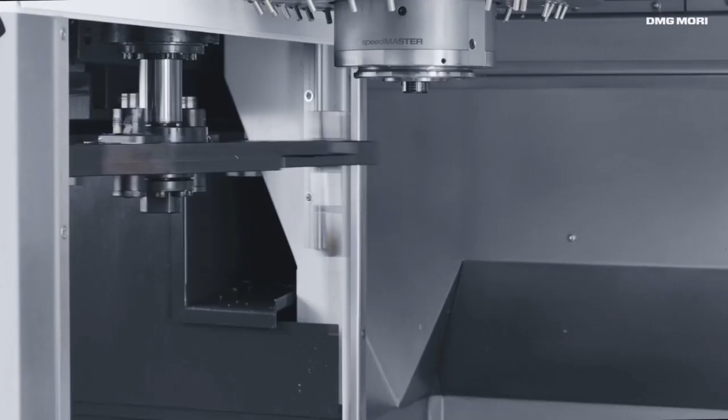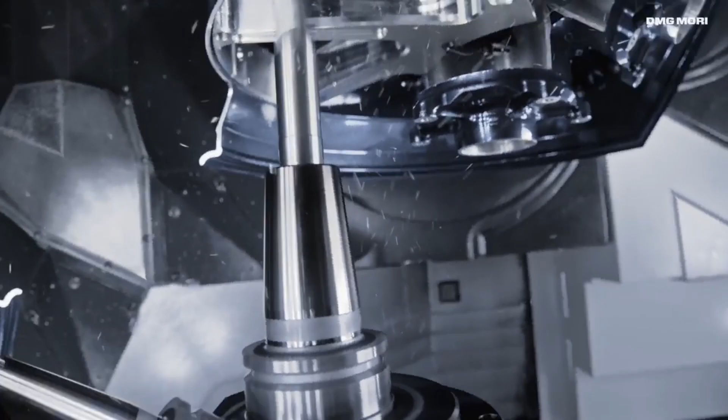The company's product portfolio is extensive and includes high quality CNC machine tools, lathes, milling machines, grinders, and additive manufacturing systems. These cutting-edge machines are designed to optimize efficiency, productivity, and accuracy in various manufacturing processes, helping businesses achieve higher levels of performance and competitiveness.

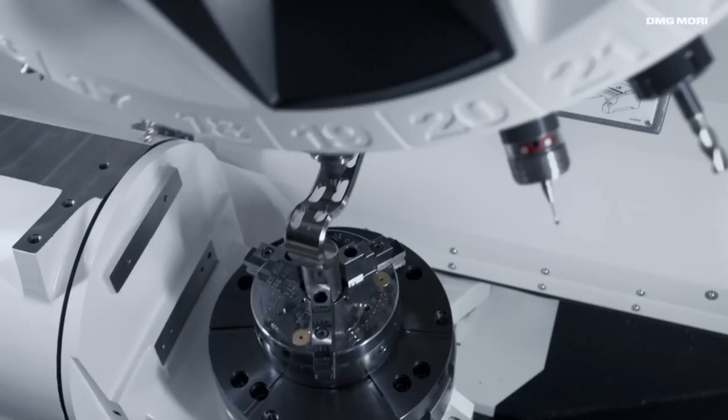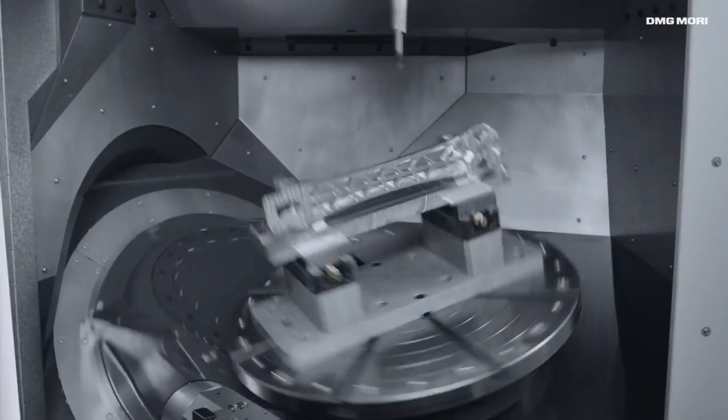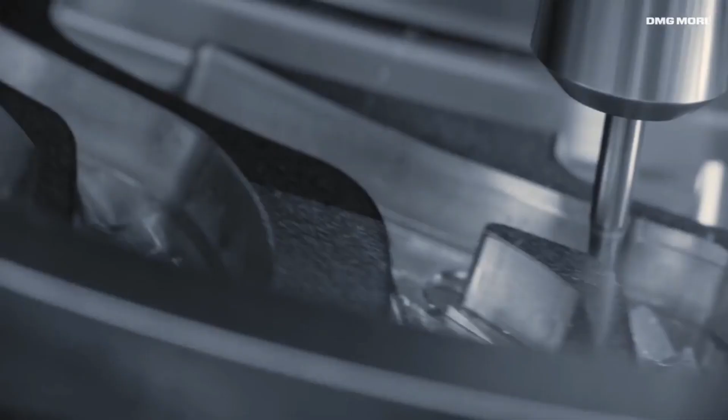DMG Mori's commitment to innovation and research is evident through its continuous development of advanced technologies, automation solutions, and software applications that enhance the overall manufacturing process. As a customer-centric organization, the company also places great emphasis on providing excellent technical support, training, and maintenance service to ensure that clients get the most out of their equipment.

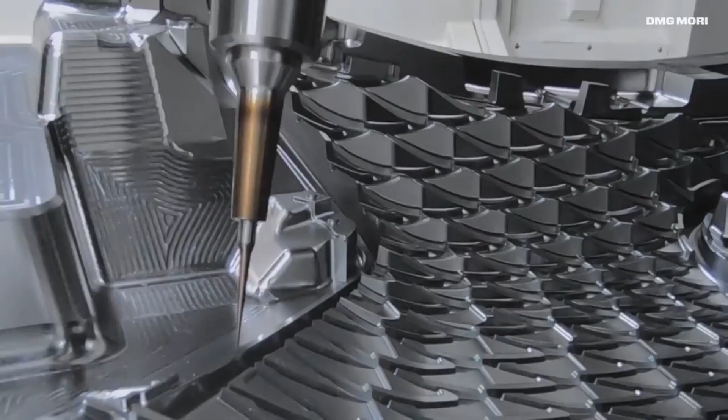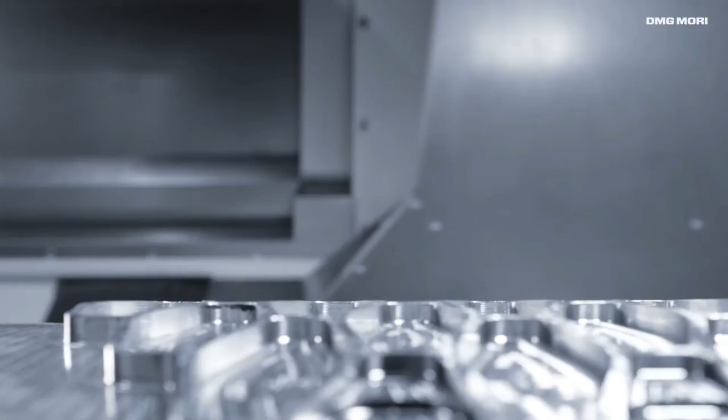In conclusion, DMG Mori's history, technological expertise, and commitment to customer satisfaction have solidified its position as a leading player in the machine tool industry, driving innovation and shaping the future of manufacturing and engineering.

In addition, I will also explain the problems and challenges that will be faced by the DMG company. Number one, they will face rising costs. Number two, shop floor productivity. Number three, lack of training among the employees. Number four, competition between the companies. And number five, technology advancement.

Rising costs. Rising prices of raw materials, increased expense of labor, or changes in government laws. DMG Mori's profit margins have been under pressure in recent years due to the rising cost of raw materials, labor and energy. Because of that, DMG Mori's production costs have increased and the company had no choice but to pass on higher prices of their products to the customer. This challenge is also caused by the company's production facilities being located in Japan, which we all know is characterized by a relatively high rate of wage inflation.

Number two, shop floor productivity. This indicates that the company's manufacturing process was not running at the optimal level of efficiency, which led to a decrease of output and increased the amount of time it took to produce the products. This could result from several issues including inefficient workflows, bottlenecks, equipment malfunction or insufficient resource utilization. For example, the machines may not be arranged in a manner that makes sense, or there may not be sufficient space for employees to easily move around. This may also be caused by the fact that the DMG Mori factories do not follow the standardization guidelines.

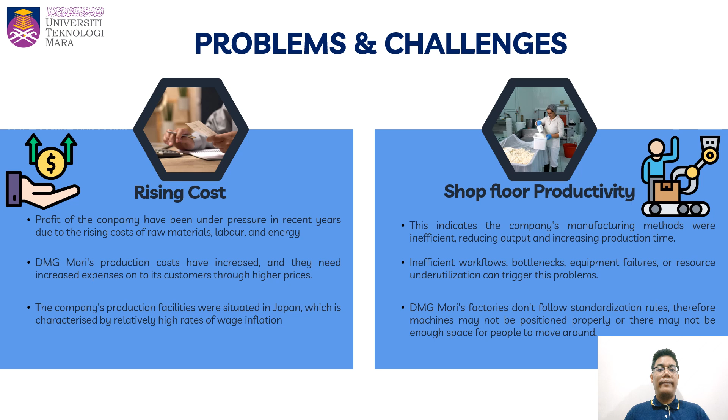Lack of employee training. The phrase lack of employee training refers to instances in which corporations such as DMG Mori fail to offer staff adequate learning and development opportunities to improve their skills, knowledge and capacities. Employees run the risk of not possessing the necessary experience and ability to properly do their job if they do not receive the appropriate training. This lack of skill can lead to inefficiency, errors and diminished capacity to handle difficult activities, which will ultimately influence the company's production and overall performance.

Number four, competition. DMG Mori faces competition not only from local and regional manufacturers but also from formidable global competitors. It can be shown that DMG Mori competes with firms such as Siemens, Mazak and Okuma. There is a possibility that international competitors will have lower labor and operating costs in their own nation, which will provide them a cost advantage.

Technology advancements. Technology advancement might make it difficult for the corporation to remain one step ahead of its rivals. Businesses that consistently put money into research and development (R&D) to come up with innovative products and services gain considerable competitive advantage. So, DMG Mori must compete with companies that are at the forefront of innovation.

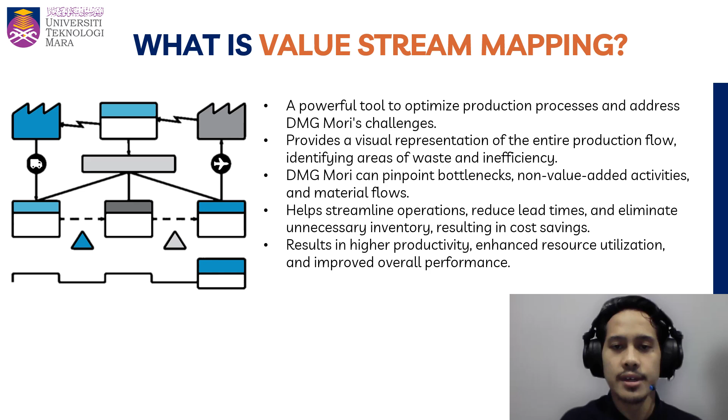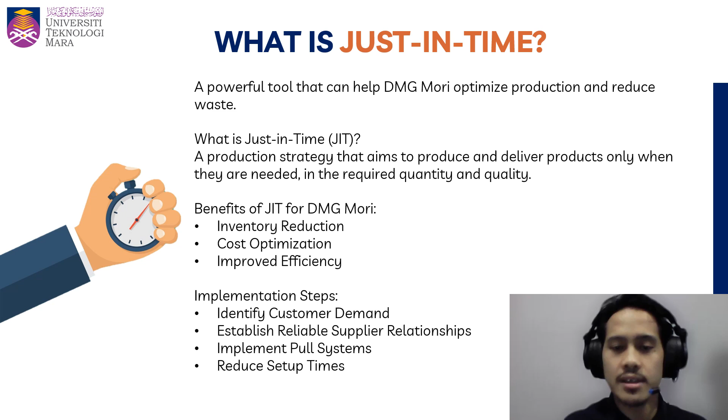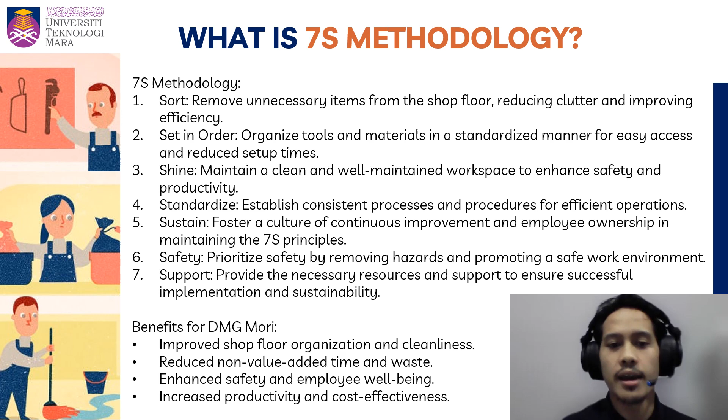By applying the 7S methodology, DMG Mori can benefit by improving shop floor organization and cleanliness. It can also reduce non-value added time and waste, and also enhance safety and employee well-being. Other than that, it can also increase productivity and cost effectiveness. Thus, implementing the 7S methodology can lead to a well-organized, safe, and efficient shop floor, addressing DMG Mori's problem and driving the company towards greater success.

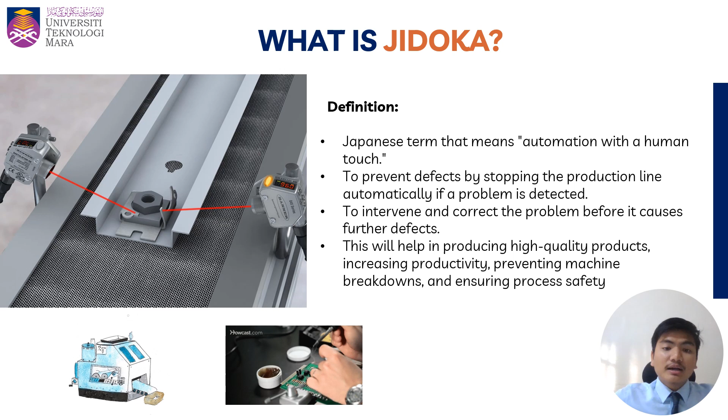This Jidoka system can be implemented in 3 parts in manufacturing a CNC milling machine: machining of components, electronics and control system, and lastly calibration and testing.

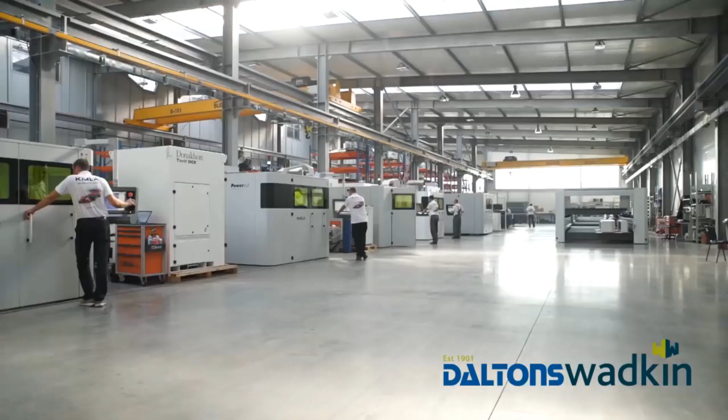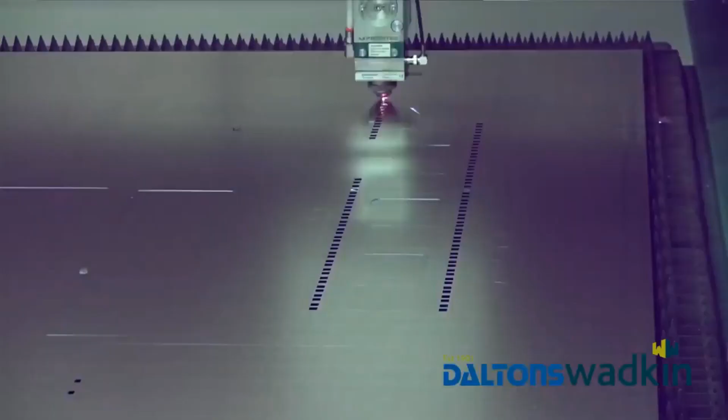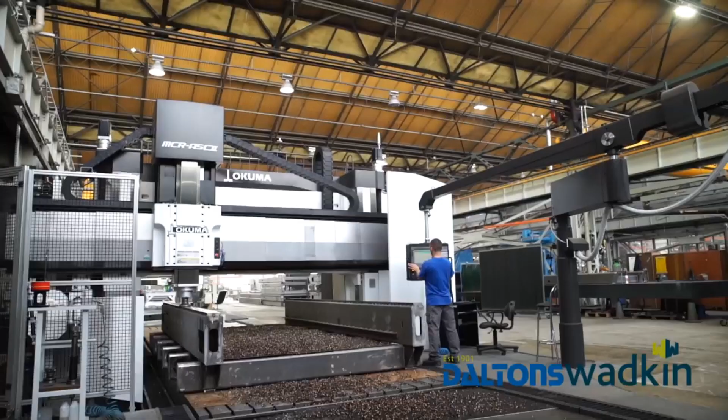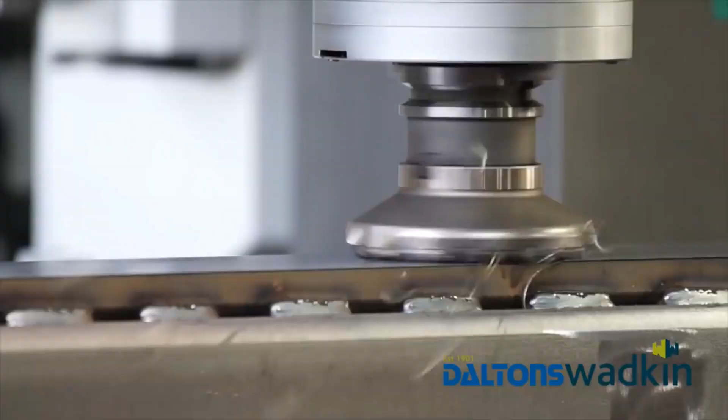The machine structural components like the base, column, saddle, and headstock are manufactured through various machining processes such as casting, milling, turning, and grinding. During the machining of the structural components, the Jidoka system can be employed, such as a force sensor. This sensor is used to monitor critical variables such as cutting force, tool wear, and spindle speed, and to provide data on the force applied during the cutting process. They are placed between the cutting tool or holder and the machine spindle or workpiece. If an abnormality is detected, the system can automatically stop the machining process to prevent the production of defective components.

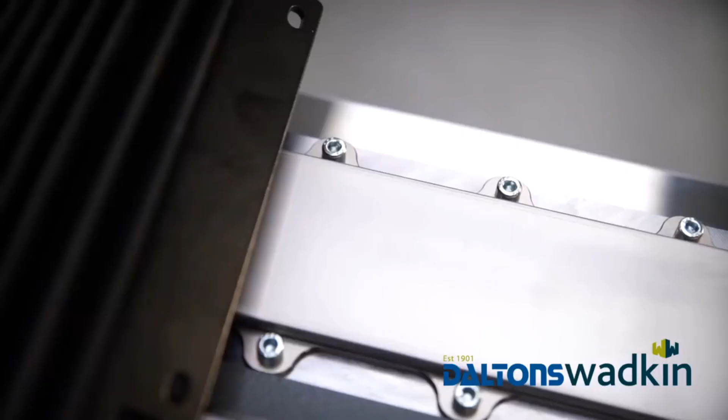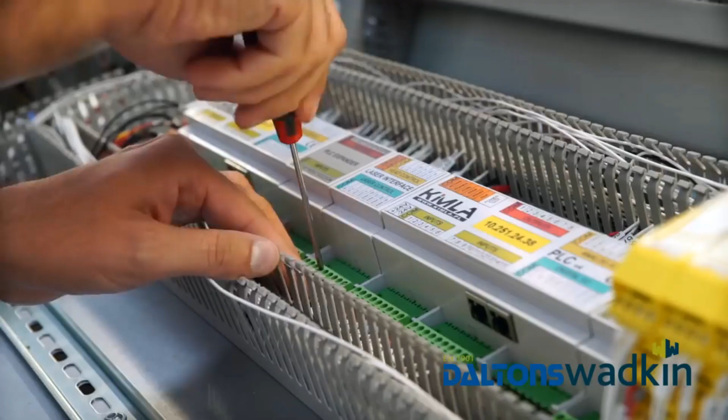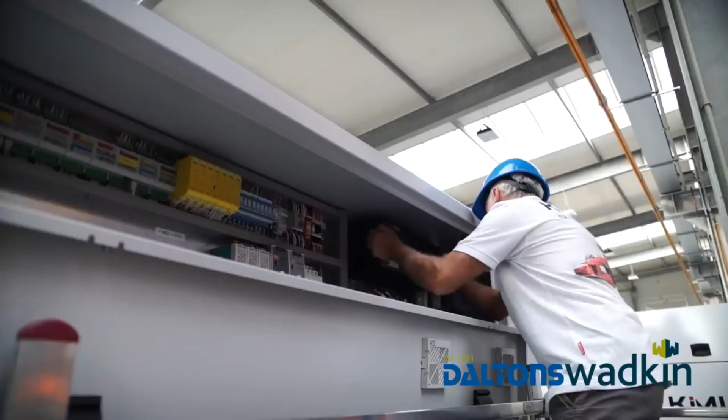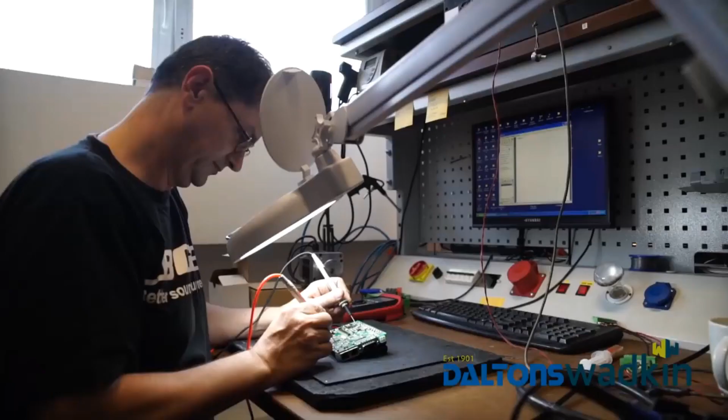Another manufacturing process that can implement Jidoka is the electronics and control system. The machine integrates various electronic components, including the CNC system, motor drivers, and controllers, which allow precise control over its movement and cutting operations. The Jidoka system employed during this stage includes a current sensor. This sensor monitors the electrical connection and motor functions by measuring the electrical current flowing through critical machine components like motors and motor drivers. Continuously monitoring the current levels, the sensor can detect any abnormal spikes, drops, or deviations from the expected range, indicating potential issues in the electrical system or motor functions.

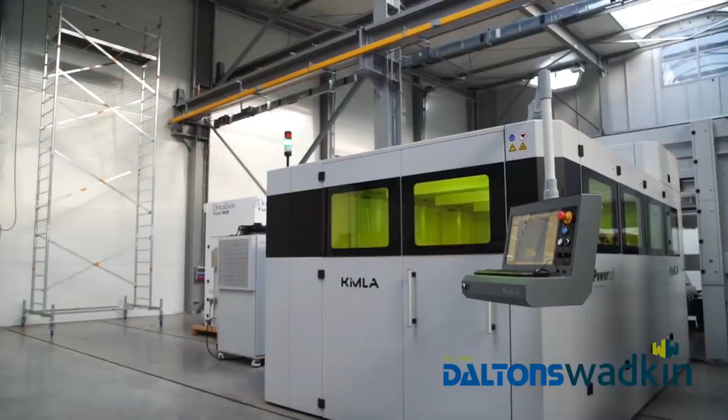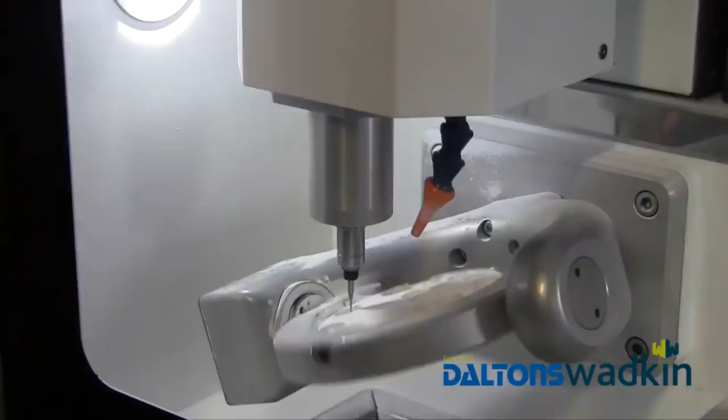When such abnormalities are detected, the Jidoka system automatically halts the integration process to prevent further damage. It also alerts the operator or maintenance personnel about the detected issue, enabling them to investigate, identify the root cause, and implement corrective actions.

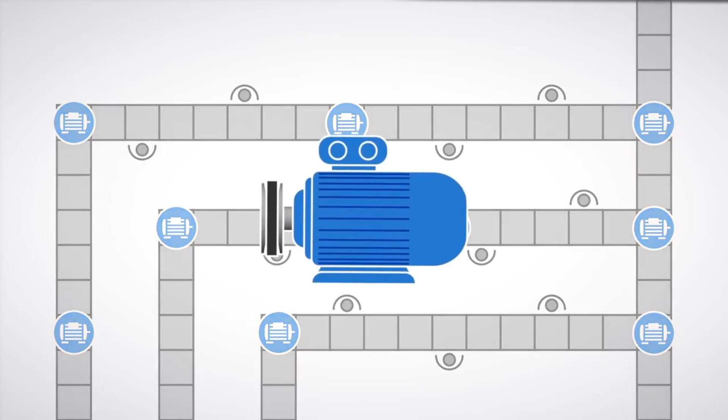Lastly, before the CNC milling machine is considered complete, it goes through calibration and rigorous testing to ensure all components and systems work correctly and meet performance standards. To improve quality assurance, Jidoka is used, which involves placing vibration sensors at critical points on the machine structure. This sensor continuously monitors vibrations while the machine operates. If the vibration exceeds acceptable levels or deviates from expected patterns, the system immediately stops and alerts the operator or maintenance personnel. This proactive approach prevents the production of defective products and allows quick intervention to resolve any issue.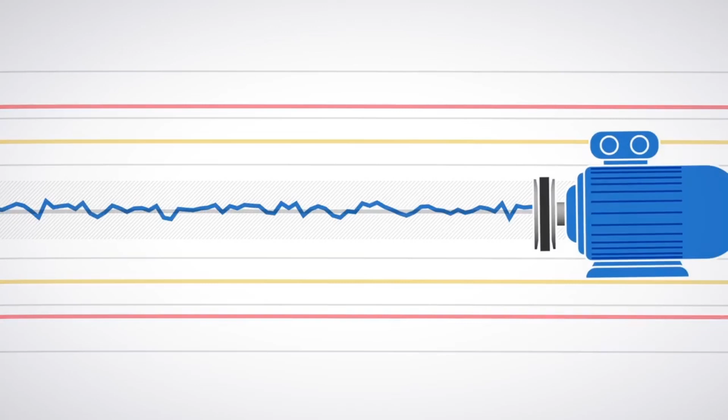Other than the Jidoka technique, the Kaizen technique can also be another method that can provide effective solutions. Kaizen is a Japanese word that refers to a process of continuous improvements in the standard way of work. It involves making small incremental improvements in efficiency, productivity, and quality. With the goal of achieving excellence in production, Kaizen can be implemented in DMG Mori: create a culture of continuous improvements, set clear goals and objectives, and lastly, provide training and support.

DMG Mori needs to establish a culture where all employees are encouraged to identify and suggest improvements in their work process. This can be done through regular communication, training, and recognition of employee contributions. When a company embraces this culture, it empowers employees at all levels to proactively identify areas for enhancement and suggest innovative solutions. This inclusivity leads to a more engaged and motivated workforce as employees feel valued and heard, resulting in increased productivity and job satisfaction.

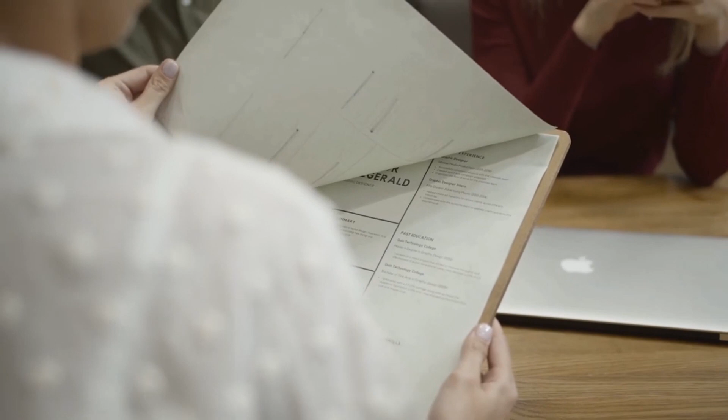Lastly, provide training and support to employees to enhance their skill and knowledge in process improvement techniques. This can include training on lean manufacturing principles, problem-solving techniques, and quality improvement tools. By providing employees with the necessary knowledge and skills through training programs and educational initiatives, the organization can significantly enhance its workforce competence and efficiency. Well-trained employees are better equipped to handle their roles and responsibilities, leading to improved productivity and streamlined operations.

Assalamualaikum, my name is Muhaimin bin Abdullah, and in this slide I will discuss the result of implementing the LPS, TPL tool or technique applied to DMG Mori. The first result showed that DMG Mori was addressing daily problems much more quickly and efficiently. The first component introduced was the 5S methodology, the Shine approach, emphasizing the importance of a clean and well-maintained workplace. By maintaining this environment, DMG Mori staff could quickly identify potential problems and take appropriate action to address them.

Next is value stream mapping. A game changer for DMG Mori was the adoption of value stream mapping, also known as VSM. This powerful tool provided them with a visual representation of their process, enabling the swift detection of bottlenecks and inefficiency. This newfound visibility enhanced their decision-making capabilities, empowering the team to implement timely improvements, thus preventing issues from escalating. As a result, DMG Mori achieved a smoother and more efficient workflow.

Next is the Tulip no-code platform. But DMG Mori didn't stop there. To further elevate their efficiency, they implemented a monitoring technique using the Tulip no-code platform to create spindle assembly apps. This innovative approach enabled increased process visibility along their production lines. Collaborating closely with the operators, the company's engineers built a custom application capturing the nuances of their work. This tailor-made solution fostered improved efficiency and overall performance throughout the assembly process.

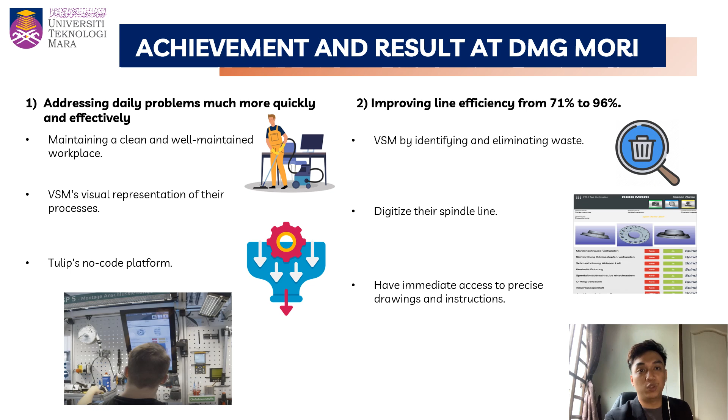Thank you, Muhaimin. Now I will proceed with the result findings at DMG Mori.

An article from TXM Lean Solutions stated that DMG Mori introduced lean manufacturing principles which made a significant difference in their operations. They were able to improve their on-time delivery by a remarkable 28%, showing how efficient they became in meeting delivery deadlines and making customers happy.

By streamlining their production processes and reducing unnecessary steps, they worked more efficiently and eliminated delays. They also use a smart concept called Jidoka, where they install sensors on their machines to help operators identify and

solve the problems quickly, which reduces wait times and improves productivity. This also gives an example of how DMG Mori embraced predictive maintenance, which is a smart way to predict and prevent equipment failures before they happen, and by doing so they save time and money by avoiding unexpected breakdowns. They probably give proper training, empowering employees to detect and fix potential issues. And this commitment to continuous improvement helped them become a reliable and successful organization in the competitive manufacturing industry.

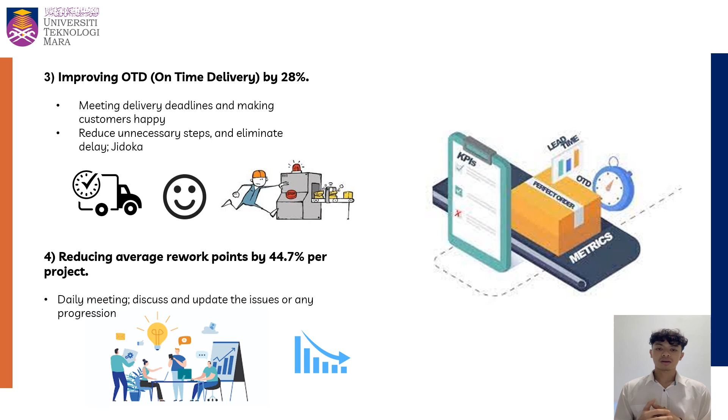Now we're going to proceed to the recommendation.

For recommendation, I will discuss 4 types of technologies that can be applied by DMG Mori in their production. Number 1 is artificial intelligence, or AI. Number 2 is autonomous robot. Number 3 is Internet of Things, and number 4 is simulation.

As the industry leader in the production of machine tools, DMG Mori faces a variety of difficulties caused by the rivalry in various markets throughout the world. The company must implement a multi-phase strategy which places focus on innovation, customer service, efficiency in operations, diversity of the market, and talent development in order to successfully overcome these challenges and achieve their goals.

Number 1, artificial intelligence or AI. Artificial intelligence has the potential to improve operation efficiency and optimize the manufacturing process.

Predictive maintenance and real-time analytics powered by AI may cut the amount of time machines are offline, cut down on unexpected maintenance, and optimize production schedules, all of which contribute to a higher level of productivity and lower overall production cost. For example, DMG Mori can use an AI-driven system which relies on complex algorithms and machine learning approaches to evaluate data, learn from patterns, and adjust their activities based on experience without explicit programming.

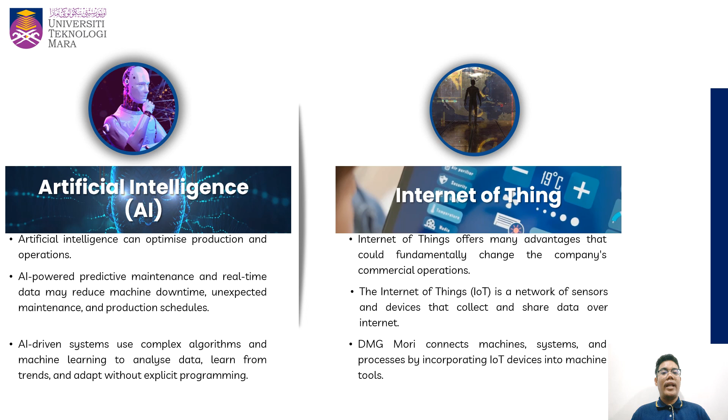The Internet of Things (IoT) is a network of linked electronic devices and sensors that gather information and share it with one another over the internet. By integrating IoT devices into the machine tools, DMG Mori is able to establish a linked ecosystem in which machine systems and processes can communicate and work with one another in a seamless manner.

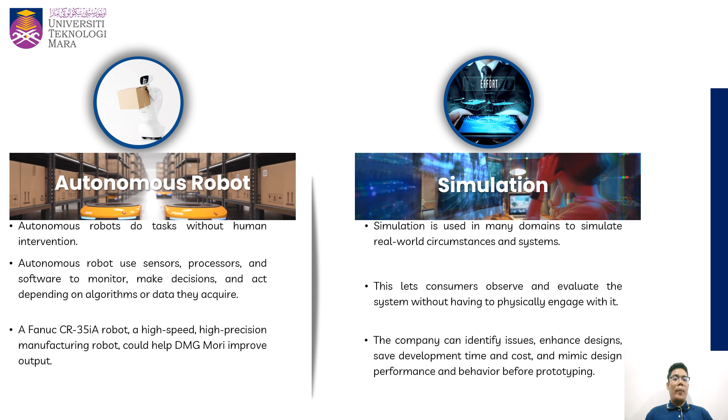Next is autonomous robots. Machines that are capable of carrying out activities or operations without the need for direct interaction from humans are referred to as autonomous robots. They are able to observe their surroundings, make judgments, and carry out activities based on established algorithms or by learning from the data they collect with the help of sensors, processors, and software that are built into them.

So DMG Mori might increase their abilities in production by utilizing a Fanuc CR35iA robot, which is a high-speed precision robot designed for use across a range of manufacturing applications.

And finally is simulation. This is due to the fact that simulation is a powerful and flexible method utilized across a wide variety of fields to simulate real-world scenarios and systems in a virtual environment. This technology enables users to view and evaluate the operation of the system without having to physically engage with it.

So the company is able to spot possible problems, improve the design, shorten the amount of time and money spent on development, and also simulate the performance and behavior of the design before physically producing them.